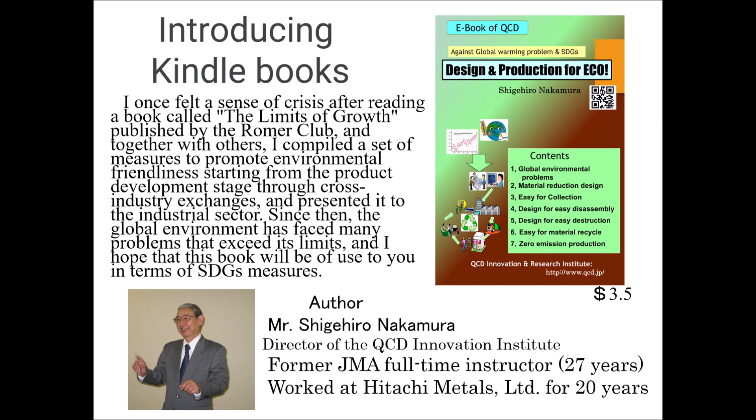After working in the manufacturing industry for 20 years, Mr. Nakamura has been a full-time lecturer at JMA for 27 years, helping companies improve their technology. During this time, he felt a sense of crisis when he saw the book Limits to Growth, published by the Club of Rome, and together with 10 companies that are advanced in this field, he compiled a method of promoting environmental friendliness from the product development stage in a cross-industry format, presented it to the industrial world, and will introduce the content that has already been widely used.

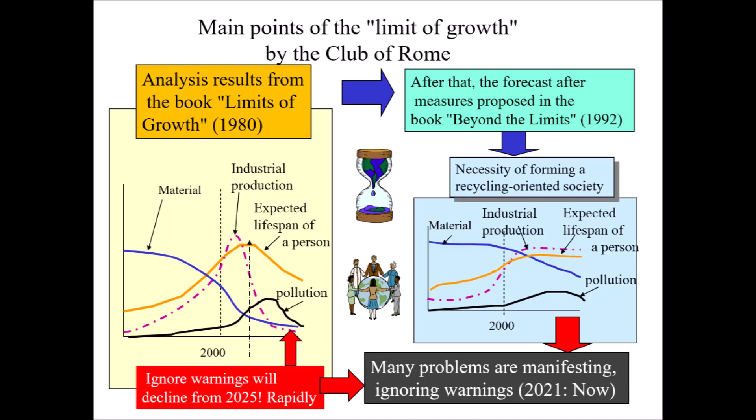As shown in this figure, in the 1970s, industrial production, which had made huge progress on a limited Earth and ignored the environment, entered a stage where various pollution problems required a rapid review. At that time, the Club of Rome used computer simulations, which had finally become possible at the time, to analyze the limited Earth's condition and scientifically demonstrated the condition we see today. As a result, many people began to take measures.

However, when the Club of Rome analyzed it again in the 1990s, various problems were progressing beyond the limits. We are now facing the problem of global warming, just as warned. At the same time, we must do everything we can to take immediate measures.

In the early 1990s, the Japanese government proposed the 3Rs for products manufactured in factories. The 3Rs are reduce, reuse and recycle, but as a result of our study group, which is enthusiastic about recycling measures and is promoting advanced measures in this area, in practice, we have come up with the 8Rs shown in the figure and have advanced specific measures for each R.

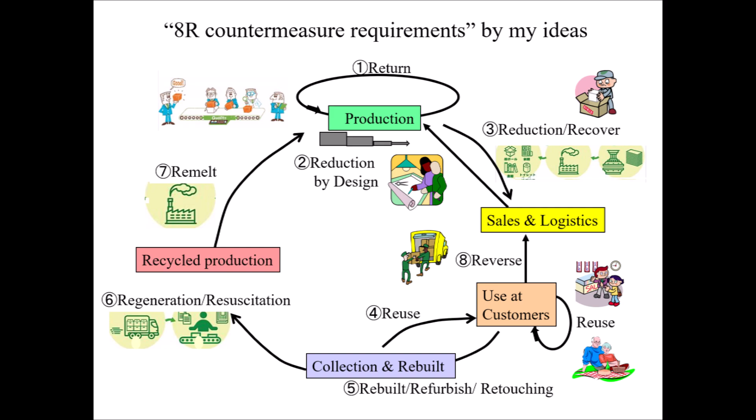In addition to the cutting-edge measures that have been made public, we have added patent research, various analyses in the technology map, and ideas from each company's technology and know-how, and have presented methods that can be used in practice in the industry, as well as introducing case studies implemented by each company, which have been made public to the industry. The details of this are described in the book currently being introduced, but from now on, I will be giving examples of the main points from the book.

For the 8Rs mentioned earlier, our Patent and Recycling Measures Research Group has created an evaluation methodology to evaluate the effectiveness of various technologies, measures, and ideas for each measure target. The whole method is shown in this diagram.

Now that we are in an era of rapid advances in IT and other areas, the first important point is to apply measures that can be used to respond to customer needs by softening products that were previously manufactured using materials and replacing them with software. From then on, for products that absolutely need to be commercialized, we will proceed with measures such as miniaturization and long life, and when these measures reach their limit, we will thoroughly implement measures to increase the recyclability of used products. In this way, the measures to minimize waste and CO2 emissions and the measures to evaluate them are shown in this diagram.

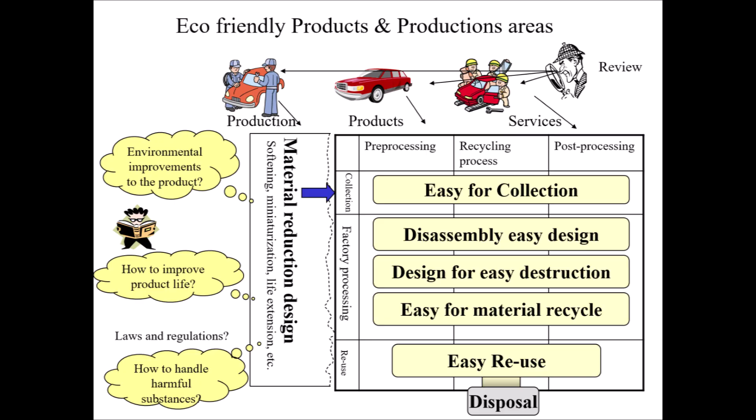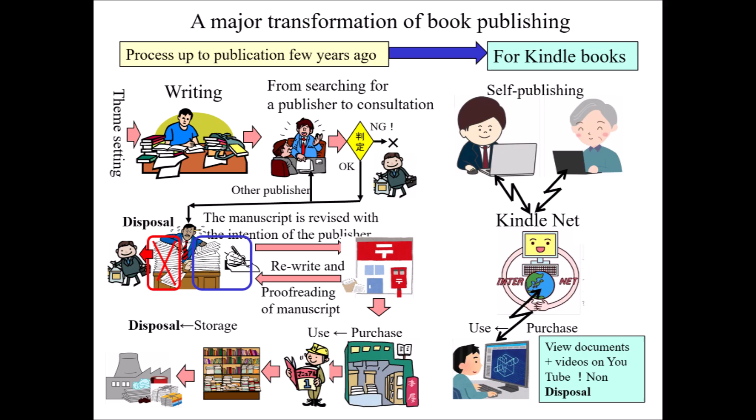Applying the above evaluation, the Kindle books introduced here are equivalent to software solutions. I show the situation in this diagram. In the past, books were published through a publisher, and handwritten manuscripts were exchanged with the publisher many times before they were finally published. However, with the evolution of IT, electronic books have now become common. In essence, book publishing was a tool for obtaining information, but with this method, paper books are no longer necessary. Furthermore, it is also possible to call up and watch videos, which is difficult even with electronic books.

Around the turn of the millennium, labor costs in developing Asian countries were 1/30 of those in Japan. For this reason, the transfer of production to Asian countries in search of cheaper labor costs, especially in the assembly industry, progressed significantly. At that time, Mr. Suzuki, the president of Suzuki at the time, requested the company's project team to produce the motorcycle shown in the figure above. The initial goal was to produce motorcycles at 1/3 the selling price of current motorcycles.

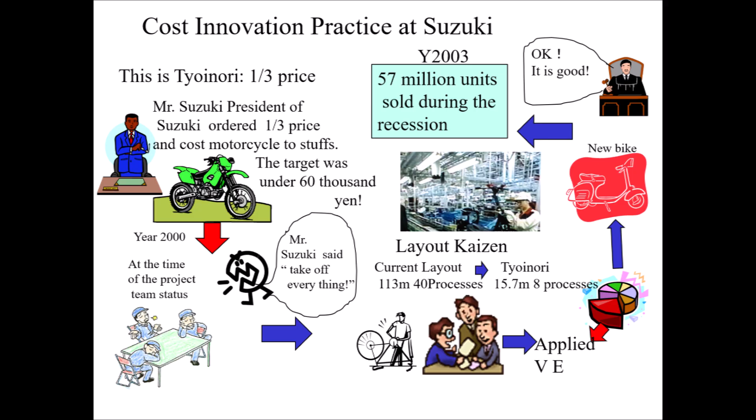However, while everyone thought it's impossible to manufacture a product with the same functions, it was realized through the process shown in the figure. This case was about maintaining domestic production, but from the perspective of the global environmental burden, it was one of the examples of significant improvements being made in this area as well.

The two previous examples of measures are called VE measures in the improvement method, and they soften existing products. In addition, measures to reduce prices by making products smaller while also increasing customer needs are also targets that should be greatly promoted in the future in terms of global environmental measures.

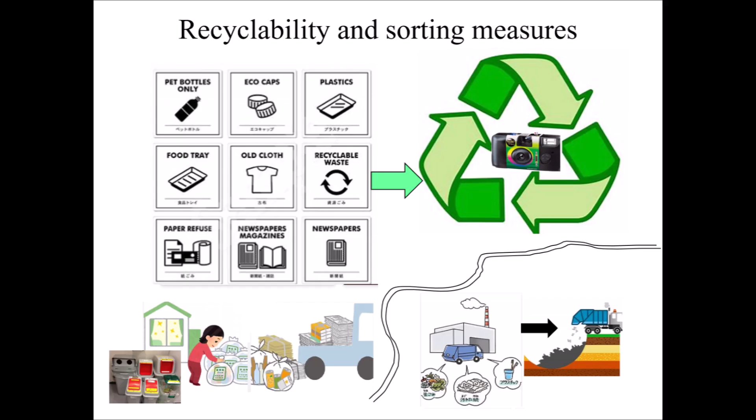After such measures, the products that should be commercialized will inevitably take the form shown in the figure, but the starting point of recycling measures is the issue of how to transport used products to recycling plants etc. efficiently and with minimal environmental impact.

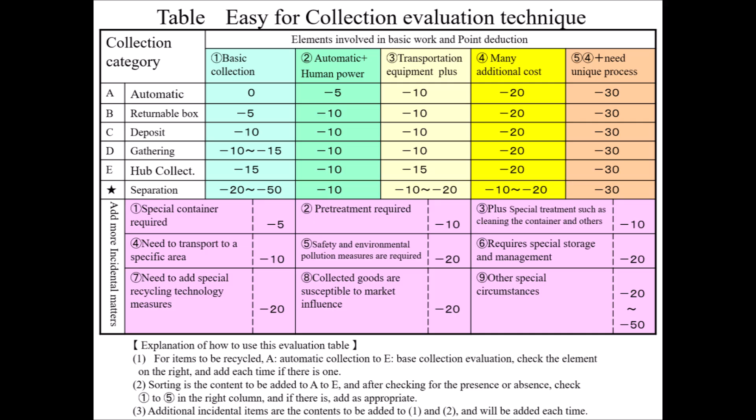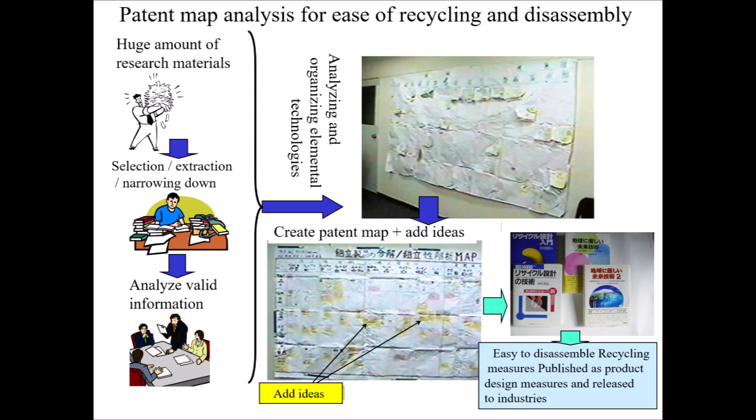Examples of ease of disassembly and their structure, as well as various innovations and improvements made from the new product stage, are given in the book as examples of Hitachi's home appliances and NEC's PCs by members of the Patent and Recycling Measures Study Group, and the evaluation of the merits and demerits of such measures and the ease of obtaining ideas are introduced in detail in the book, including the process of analyzing them using patent maps like this one.

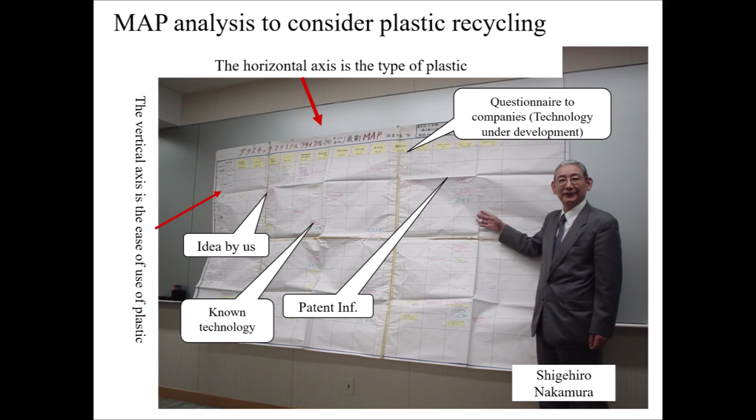Microplastics are currently a major problem in the world's oceans, and this map analyzes the ease of recycling plastics. When plastic and metal products are designed with ease of disassembly in mind, the reusability of the disassembled parts increases. For this type of evaluation, please refer to the evaluation techniques for ease of disassembly and examples of countermeasures described in this article. However, for items that are not easy to disassemble, it is necessary to use mechanical, thermal, or chemical processing to separate the materials.

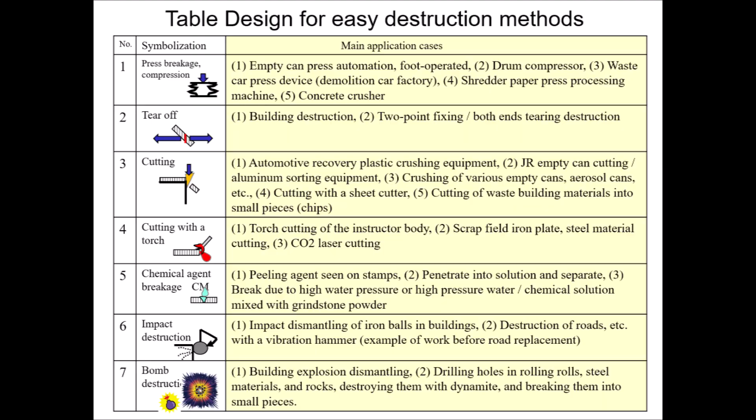Therefore, we decided to use this destructibility evaluation for such countermeasures. The collected and decomposed materials will be reused by dissolving, chemically processing, and other processing techniques, and will then be used as recycled materials. Therefore, in order to evaluate and reduce the ease of this process and its impact on the global environment, we have compiled information such as evaluation tables and case studies created by this study group.

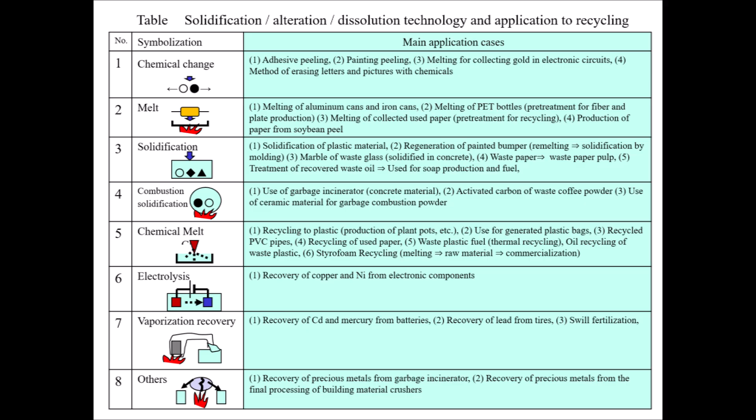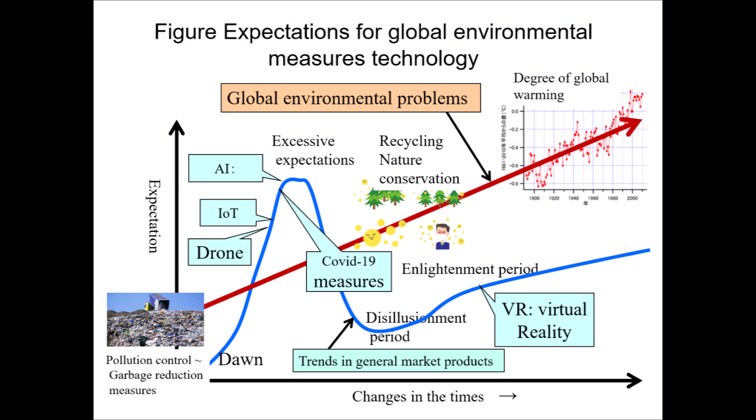For example, in Japan, the selling price of rice increased sharply in 2025. For this reason, the government encouraged increased production. In addition, although most rice cultivation in Japan is done on paddy fields, if the period during which paddy fields are used is reduced, there are cases where credits are made under a system called J-credit, which contributes to reducing methane gas emissions, even in the rice cultivation society.